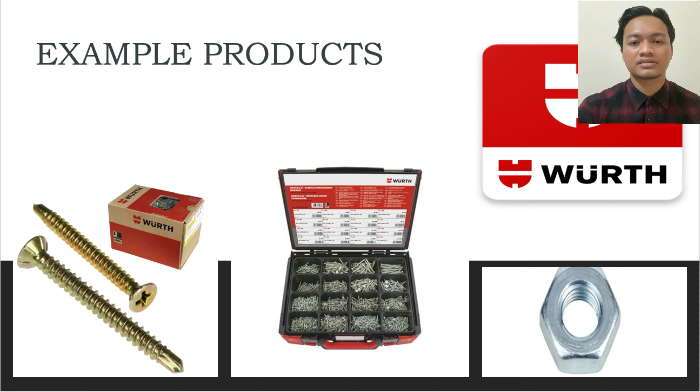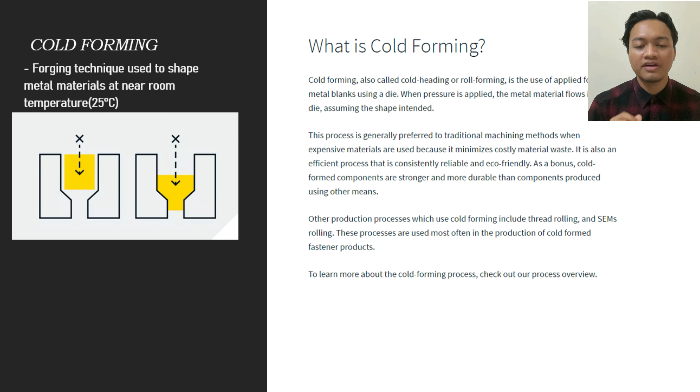I'm Iman Hakim Rosdan. I will be presenting regarding the cold forming and hot forming process. What is cold forming? Cold forming is a forging technique used to shape metal materials near room temperature, which is 25 degrees Celsius. Let's watch this video.

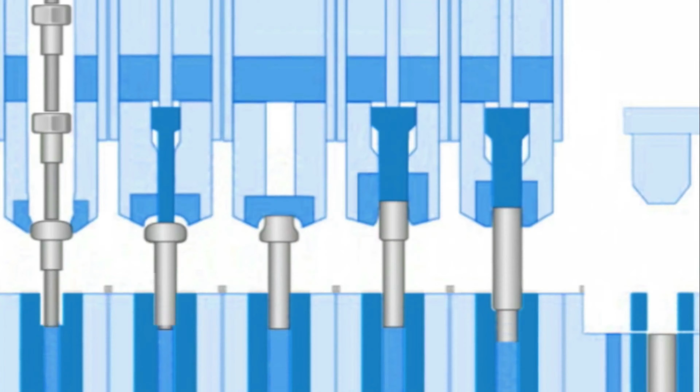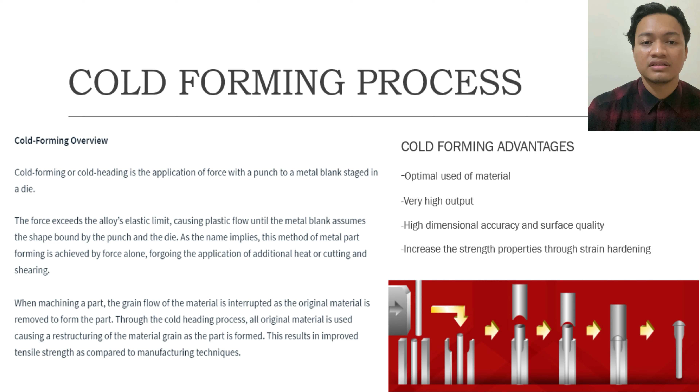Manufacture complex precision and multifunctional parts consisting of up to 6 forming stages. These are some advantages of the cold forming process: optimal use of materials, very high output, high accuracy, dimensional and surface quality, and increased strength properties through strain hardening.

So what is the hot forming process? Hot forming process is metal shaping for malleable metal parts, and it undergoes 75% of its melting temperature. It is for larger diameters and larger pieces like M27 screws, approximately 300 millimeters. It doesn't undergo any strain hardening process.

What are the advantages of the hot forming process? First, it enables production of complicated geometries. Second, low production runs. Last, large diameter and length products will be produced.

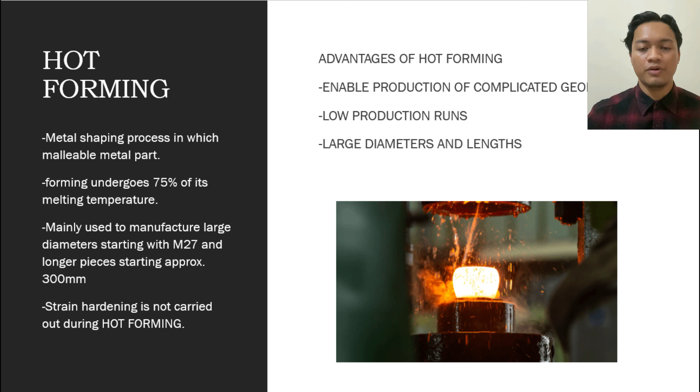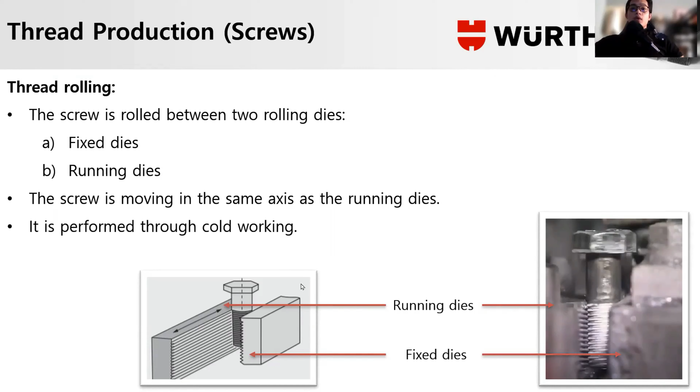In this company, the main method they use to make threading is the thread rolling process. In thread rolling, the screw is rolled between two rolling dies, the running dies and the fixed dies. The screw moves in the same axis as the running dies, and it is performed through cold working. This is an example video of thread rolling.

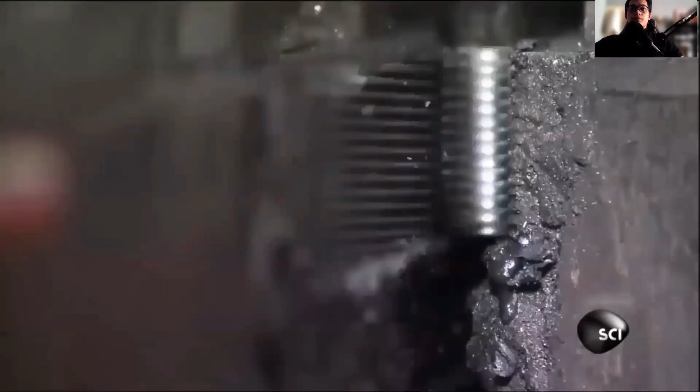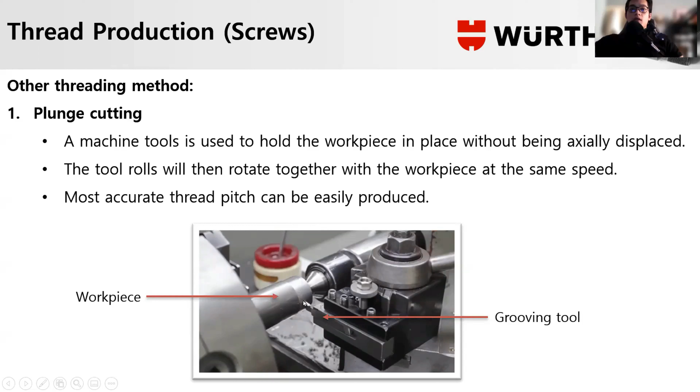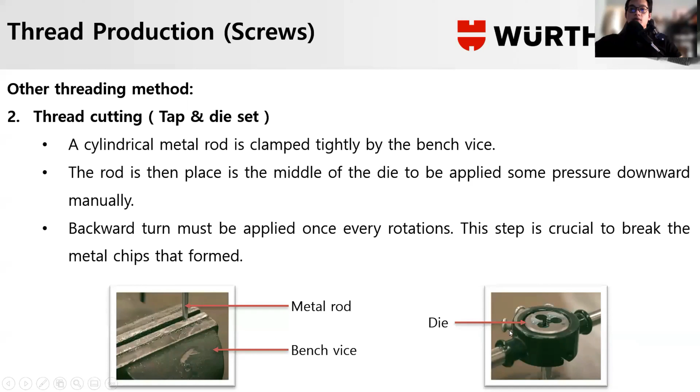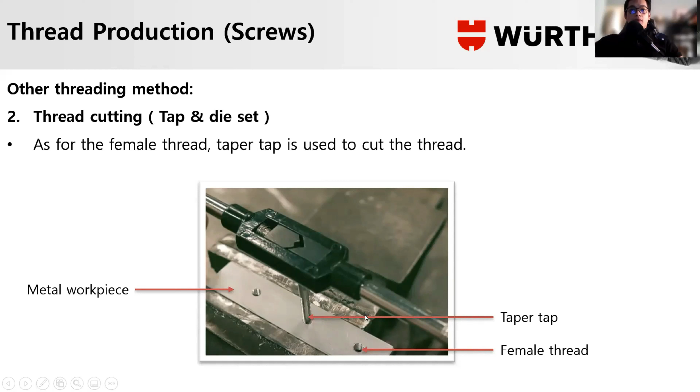As for the female thread, the taper tap is used to cut the thread. This is an example of a female thread done on a metal workpiece using the taper tap.

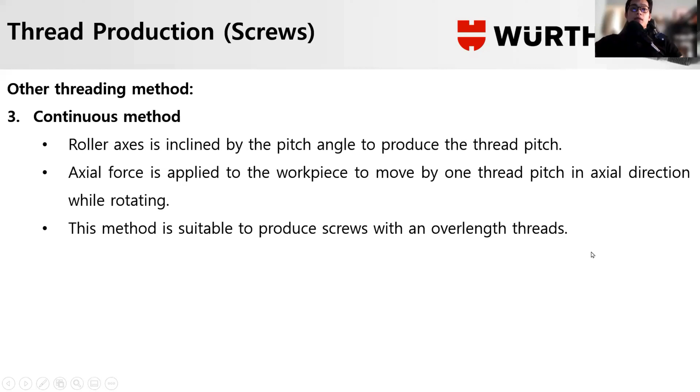Lastly is the continuous method, where the roller axis is inclined by the pitch angle to produce the thread pitch. Axial force is applied to the workpiece to move by one thread pitch in the axial direction while rotating. This method is suitable for producing screws with overlength threads.

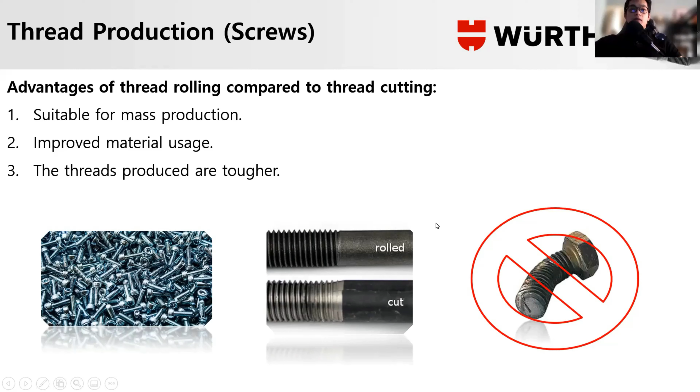I'm Irfan Hazwan. Today I will present the heat treatment process, which is the process needed to create the screws and nuts. Okay, we go to the first step.

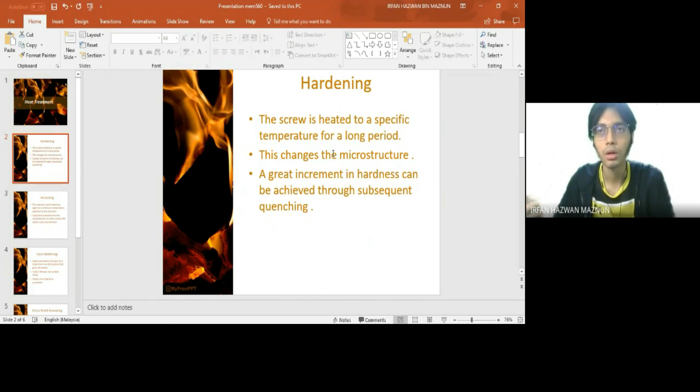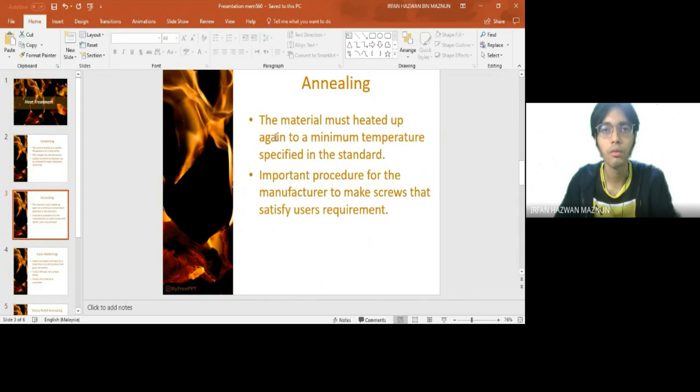Okay, next step is the case hardening.

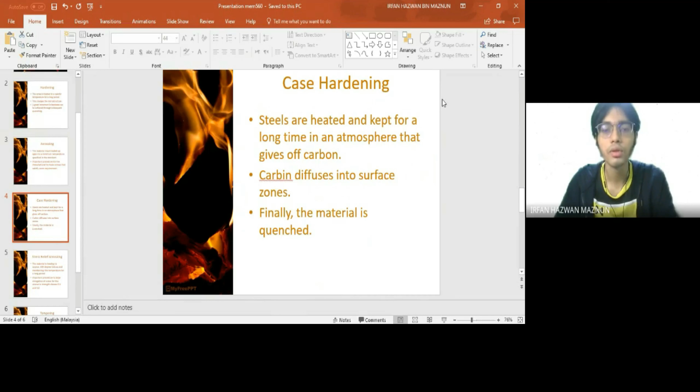In case hardening, steels are heated and kept for a long time in an atmosphere that gives off carbon, for example methane. The carbon diffuses into the surface zones, increasing the local carbon content. This process is known as carburization. Finally, the material is quenched and hardened in the surface zones. This has the advantage that the surface is very hard, but sufficient ductility remains in the core of the screw.

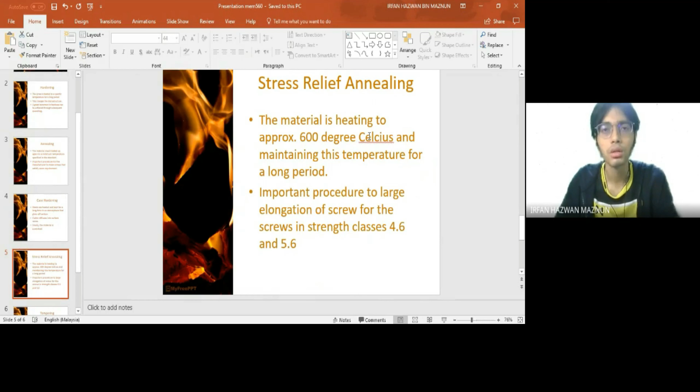Next step, stress relief annealing. Here the material is heated to approximately 600 degrees Celsius and maintained at this temperature for a long period. The strain hardening created by cold forming can be reversed by stress relief annealing. This is particularly important for screws in strength classes 4.6 and 5.6, because here there has to be a large elongation of the screw.

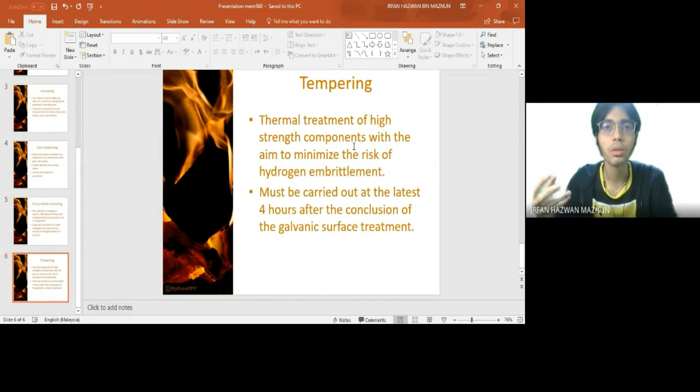For the last step, we go to the tempering process. Tempering is the thermal treatment of high strength components, which is strength above 1000 megapascal or hardness above 320 HV, with the aim to minimize the risk of hydrogen embrittlement. Tempering must be carried out at the latest 4 hours after the conclusion of the galvanic surface treatment. The minimum temperature depends on the strength classes or on the materials used. Okay, that's all from me. Thank you.

Assalamualaikum. I'm Irfan Rusyaidi bin Amirudin, and with me I will be explaining our product's quality assurance.

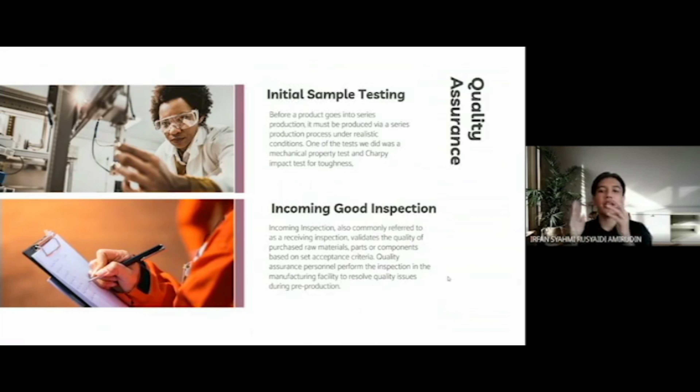First, we have initial sample testing, where we test our nut and screw initial samples under a series of tests. One of the tests is a mechanical property test, and we also have a Charpy impact test for toughness. Next, we have incoming goods inspection, where we take our raw samples and inspect them, so that we can make sure there are no quality issues that arise during pre-production.

Next, we have complaint processing. Here we take our customer's complaint sample and give it to our complaint officer. He will then finish the complaint investigation and provide a clear conclusion to the rest of the team and also to the customer.

After that, finally, we have new product testing, where newly produced products are tested again to make sure the quality is aligned with our customers' needs, and to make sure our customers have a great user experience.

For material, what we will be using is stainless steel A4, which has a similar tensile strength to an 8.8 grade alloy. It will have an 800 megapascal tensile strength, with a ratio of 0.8. Thank you, that's all from me.

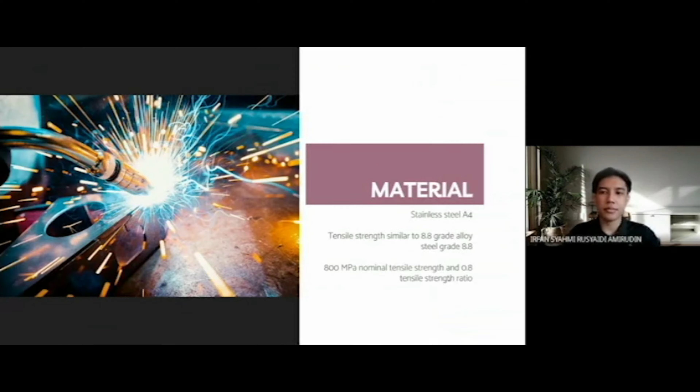Assalamualaikum warahmatullahi wabarakatuh. My name is Irfan bin Rusdi. I would like to present a discussion about our products, which are nuts and screws.

First, I would like to suggest the manufacturing process, which is thread cutting. Thread cutting is an operation performed on a lathe to produce threads using a tool whose shape is the same as that of the thread. Thread rolling, on the other hand, is a threading process that involves deforming metal stock by rolling it through dies.

In thread cutting, cut threads have a grain flow pattern that remains parallel to the part axis, weakening the thread strength in the longitudinal axis. The thread will typically fail at grain boundaries, which tend to be weaker than the grain itself. In thread rolling, the grain flows in a transverse direction, providing resistance to failure where these forces are exerted across the grain.

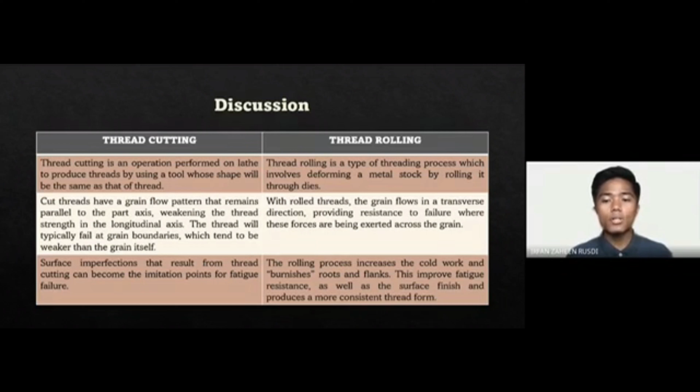Surface imperfections resulting from thread cutting can become initiation points for fatigue failure. In thread rolling, the rolling process increases cold work and burnishes the roots and flanks. This improves fatigue resistance as well as surface finish, and produces a more consistent thread form.

The causes of screws or nuts loosening or falling apart are: number 1, frequent jerking; number 2, sloppy tightening; number 3, sudden impact; and number 4, expansion caused by heat.

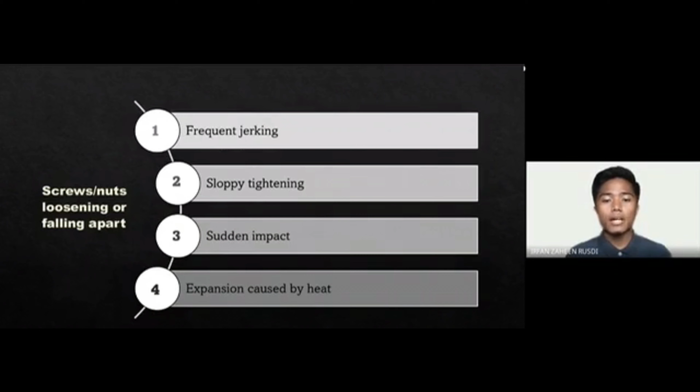The advantages of wheel lock nuts are: simple, safe, fast installation even for non-specialist users; second, preserves surfaces; third, permanent fixation and correct positioning of the wedge lock washers; and lastly, reusable without loss of quality.

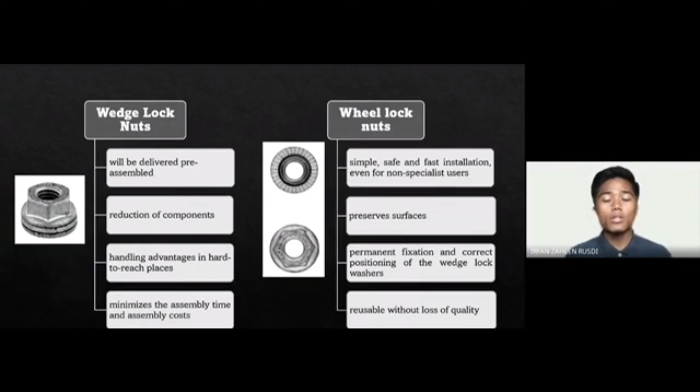Other products that can be produced using the same method are bolts, electrical contacts, and rivets. For bolts, the term bolt is usually used for a fastener which has only part of its shaft threaded. The unthreaded part of a bolt shaft is called the shank.

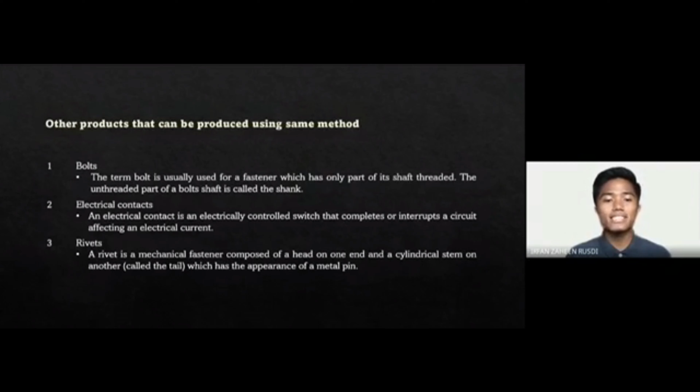Electrical contacts: an electrical contact is an electrically controlled switch that completes or interrupts a circuit, affecting an electrical current. Rivets: a rivet is a mechanical fastener composed of a head on one end and a cylindrical stem on the other, called the tail, which has the appearance of a metal pin.

That's all for me. Thank you.